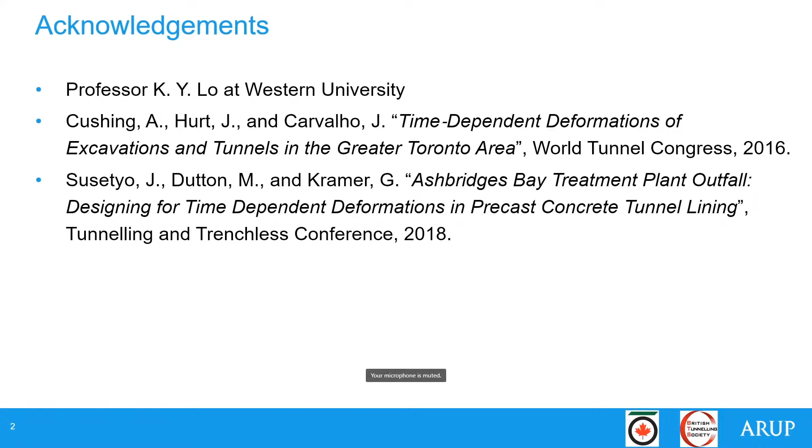Today's presentation is sorted into two groups. First off, we'll be talking about the geology and the background of these shales in Southern Ontario and discussing the various mechanisms and characteristics that they feature. The second half of the presentation, I'm going to focus on three case studies, primarily the Billy Bishop Airport Pedestrian Tunnel, the Hanlan Feedermain, and if time allows, the Heart Lake Tunnel. Finally, I'll summarize with a few takeaways and things for you to remember going forward.

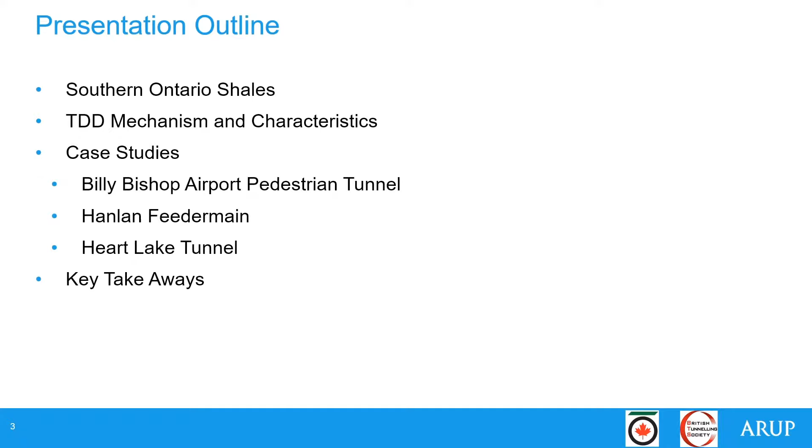The Georgian Bay Shale, which is referenced more than the Queenston Formation, gets a lot more attention because it's what is found primarily around the GTA and where the majority of these infrastructure projects are located. The Georgian Bay Shale is geologically described as moderately weathered to fresh, gray to dark gray, and fine to very fine-grained fissile shale.

It is the formation. It has widely spaced vertical to subvertical joints, as well as closely spaced subhorizontal bedding planes. These bedding planes, or interbeds, are described as slightly weathered to fresh, also gray, and graded with siltstone and limestone. The bedding planes are on average 15 to 30 centimeters thick. If you look at the image on the right, which is a good cross-section of the Georgian Bay Shale, at the top of the image is one of these very thick limestone interbeds.

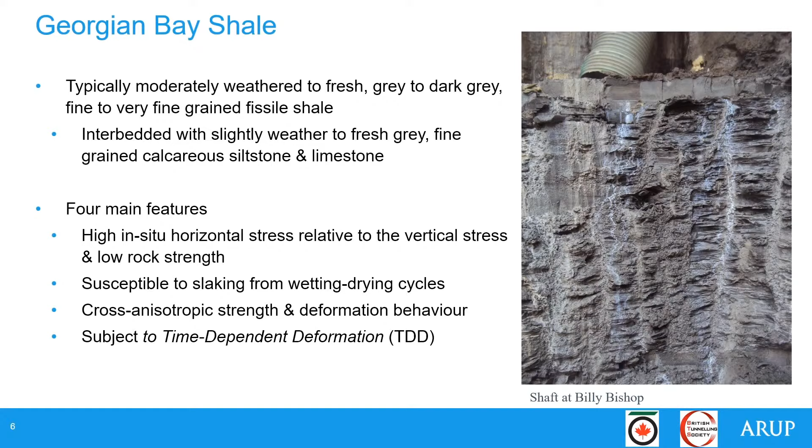Before we go further, we should discuss the nomenclature and what we actually mean by time-dependent deformations. When we think about rock, we're often thinking of two primary mechanisms. We have squeezing: when you have a weak rock, immediately upon excavation, the rock might become plastic and

displace inwards towards the excavation, primarily due to both gravity and stress gradients and redistribution of those stresses. This effect is fairly immediate soon after excavation.

Swelling, on the other hand, is a much longer process. It's often the result of volume change of the rock mass due to water absorption or adsorption effects. Because of this slow absorption of water, it's a quite lengthy process and usually requires a significant amount of time to actually notice a change in displacements.

So when we talk about time-dependent deformations, the literature is actually trying to capture both of these effects together, both squeezing and swelling, the simultaneous occurrence of both of these happening. That being said, a lot of the terms over the last several decades have used the term swelling just in their nature, and so I'll be sticking to that standard as I describe this further.

So let's discuss the various mechanisms, characteristics, and why we are concerned about them. As I was mentioning before, this isn't your typical rock swell phenomenon.

Looking at the mineral composition of these shales, doing an X-ray diffraction test, we see that there's actually rather small minimum amounts of swelling clay minerals found in the rock. Also, there's very negligible amounts of swelling minerals such as anhydrite or pyrite. So it's not your typical mechanism that people think of when they think of swelling.

Lee and Lo, in a rather landmark paper in 1993, showed that over a period of several weeks, the salinity of a sample, the blue line, slowly decreased over time, whereas the vertical strain of the sample showed to be increasing over time.

So they determined that the driving mechanism was this exchange of cations between the salt-rich pore water of the rock mass and the ambient fresh water. Getting a little technical, what that actually entails is the cations leaving the sample from diffusion and fresh water entering into the sample from osmosis.

This process propels both the formation of micro and macro cracks, leading to the sample becoming saturated and leading to an increase in volume. So to emphasize, this process of diffusion and movement of water is a rather time-dependent behavior, owing to the fact that we have this time-dependent net result.

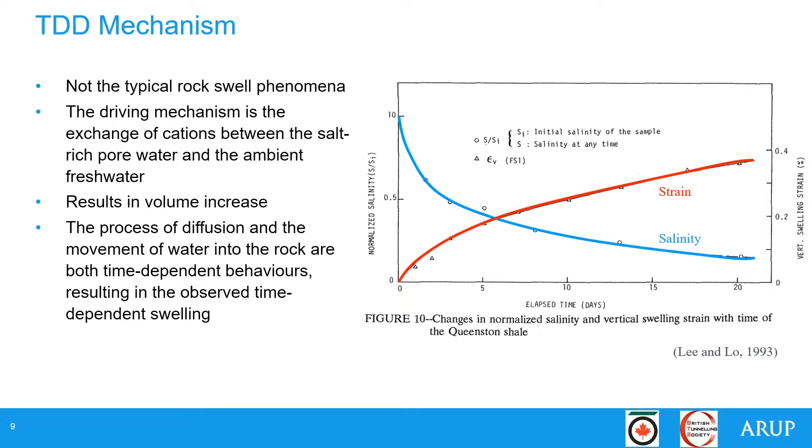There are several conditions required to initiate this swelling. Lee and Lo in that same paper identified three. There needs to be a relief or a change in the stress state of the rock mass, such as from an excavation, for example.

There needs to be accessibility to water immediately in the vicinity, and that water needs to be fresh. There needs to be an outward salt concentration gradient between the fluid found in the rock and the ambient fluid on the surface.

It doesn't necessarily need to be saturated or have water always present on it. It can also be from humid air in the vicinity as well, creating this concentration gradient.

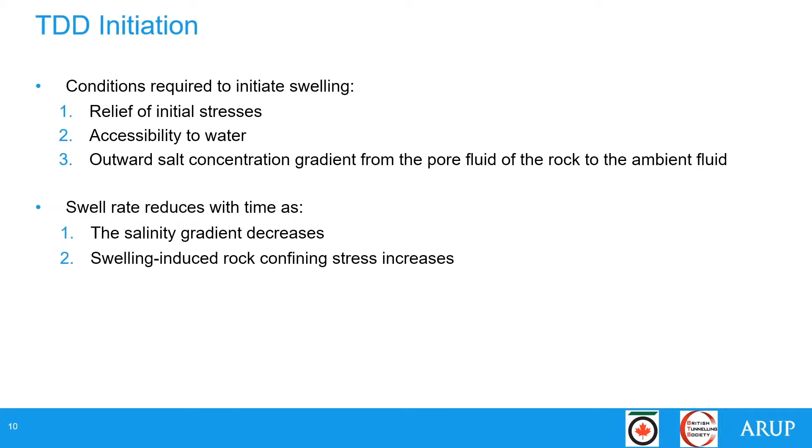Over time, the swell rate reduces. This is just due to the salinity gradient decreasing over time. As the process goes on, the concentration decreases, and so the swell rate decreases. However, as this process goes on, the swelling-induced rock creates a confining stress or pressure that gets exerted from this process, which we need to consider.

There's been a fair amount of research over the last century. As early as the early 1900s, researchers have appreciated this subject.

In Niagara Falls, a rather large waterfall in southern Ontario, there's a power generating station, and engineers started to measure the displacements of the wheel pits and what was happening over time. We've seen this plot that starts in the early 1900s. On the vertical axis is movement, and over half a century or more, there's upwards of 1, 2, or even 3 inches of movement, so quite significant.

Then in the 1950s, there was renewed interest in this material because the Sir Adam Beck generating station was going to be constructed, and people started looking once again into this phenomenon.

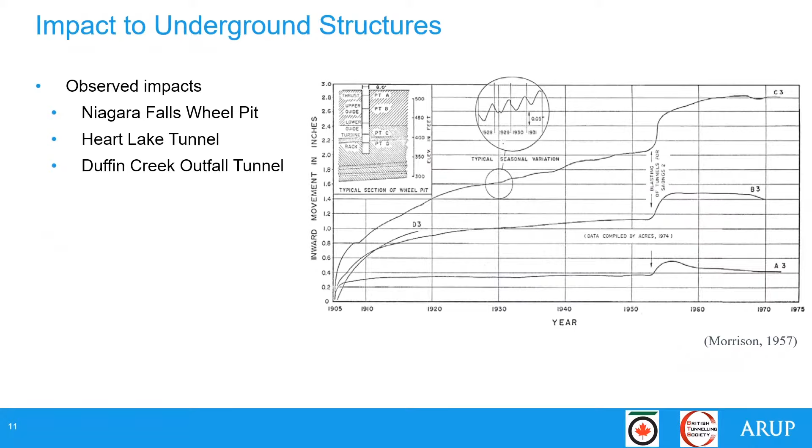In the 1970s, there were 2 principal projects, both the Heart Lake tunnel and the Duffin Creek outfall tunnel. They both experienced severe cracking at their spring line. The Heart Lake tunnel, which we'll talk about later, within just 3 years of its completion had severe cracking of its spring line, leading to the need for rehabilitation and further research into what happened. A very similar effect was seen on the other project as well.

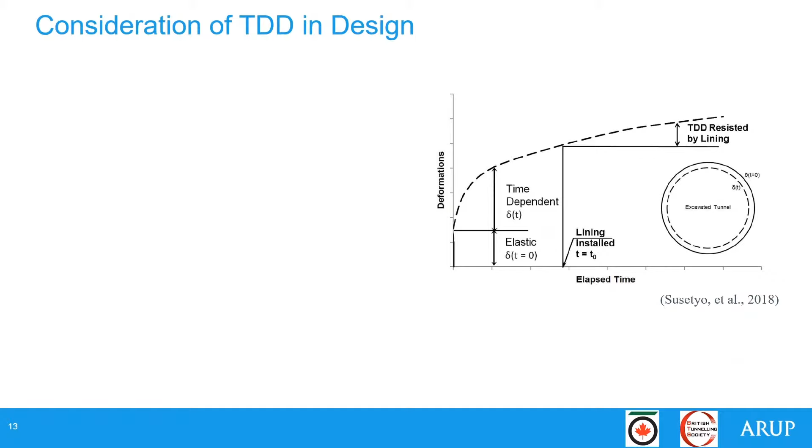If we install a lining at some point, T0, after the initial time—perhaps a segmental lining put in place by a TBM, or the final lining cast in place for a permanent shaft—once it gets installed, if we draw a line up, we can see how much additional movement the ground wants to impart. That additional movement is going to cause a stress on the lining, depending on how flexible or stiff it is.

To recap, the consequence of TDD is additional stress on the lining, which needs to be considered. There are 3 principal ways to do this. You can wait—a pretty common approach for many projects in the GTA. By waiting 100 or more days upon the initial excavation, a large percentage of the expected movement is going to dissipate and just expand into the exposed open shaft, so we won't have to worry about such a large percentage displacement.

The other approach is to apply a compressible material. If you imagine putting some foam between the rock face and your final concrete lining, if the rock wants to keep moving, that's fine—it can just push on the foam and only minor stresses get transferred to the lining.

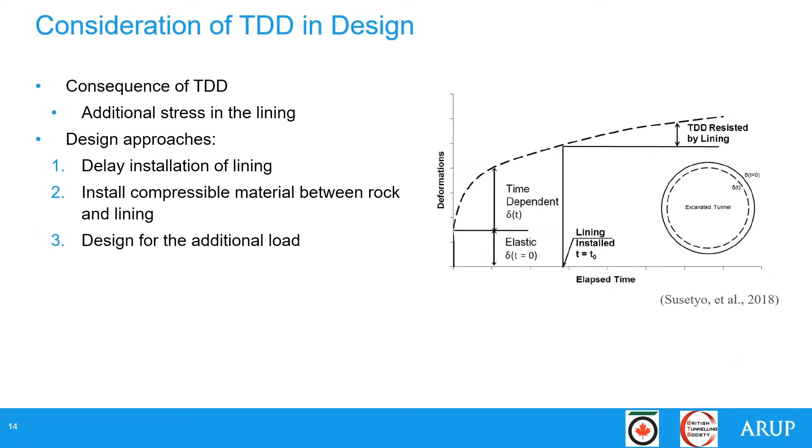The third approach is to design for it. If you have a good grasp of how much displacement is going to occur and good input parameters, there's enough knowledge out there in the industry now that we can put some numbers to this and design the lining accordingly.

So let's talk about how we quantify TDD, returning to this wheel pit example. I've now taken that information and plotted the values on a log timescale. A lot of approaches for TDD plot things on semi-log scales, which helps show correlations a lot better.

For different depths along the shaft, several different monitoring points were examined: A, B, C, and D. It's quite interesting to see that the measured displacements were quite different at different spots—overall a similar magnitude, but different rates.

For example, the orange and yellow lines had very little displacement for the first 100 days, and then soon after, around day 200 or 300, displacement started picking up. Perhaps at this point some stress changed in the ground, or perhaps more fresh water was exposed to the face and displacement started picking up.

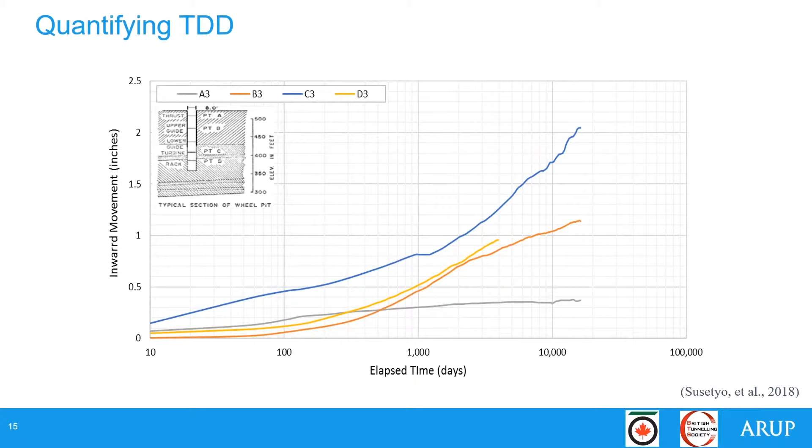On the other hand, the blue line shows a very consistent increase in displacement over time. The main takeaway, however, is that when viewing the displacements on a semi-log graph, we see a rather linear relationship.

So to recap, if we plot that swelling strain or displacement against a semi-log scale, we can see a linear relationship. Researchers have termed this swelling potential as the slope of this line. For example, in this graph, 0.223 is the swelling potential of this sample. A higher percentage or swelling potential just means a higher tendency for the rock to swell upon stress relief.

Most lab studies are done over 100 days. Generally, we don't look at the effects over the first 10 days. They're deemed too short a period over the grand scheme of what we're looking at here in terms of years, so we disregard the first 10 days. That leaves us with between days 10 and 100 as a good place to draw correlations from.

Ideally, it'd be great to have a lab study that runs for hundreds of days afterwards, but that's not practical. We can't have a geotechnical exploration before a project that requires 3, 4, 10 years of data collection before we can draw conclusions. So we're forced to look at just the first 100 days to figure out what's going on. The only other way to look at what happens after the first 1,000 days, or the first 2.5 years, is to look at example projects where people have gone back, such as those wheel pits in Niagara, and seen what has actually happened.

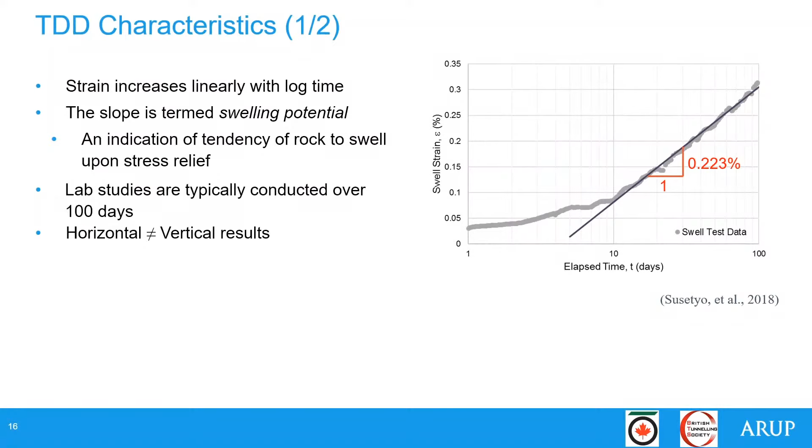If we take this information and start plotting it against the applied stress to the sample, we can start seeing some interesting relationships between the applied stress and time.

Lo and Lee, in their 1990 paper, discovered a rather interesting relationship: when stress is applied to the sample, less swelling is observed. If we apply 5 MPa, the sample reduces how much swelling occurs. However, if we apply a lot of stress above a certain threshold called the critical stress, the swelling pressure goes away entirely. The sample ceases to move, it's contained. This is determined from a type of test called the null swell test, which we'll get to on the next slide.

Lo and Lee also discovered another interesting phenomenon called the pseudo-Poisson's effect. If we apply stress in one direction, such as the vertical y-axis, and measure the displacements in the other direction, the horizontal or x-axis, we actually see a reduction in displacement in that axis as well. So what's going on is if we squeeze in one direction and measure in the other, there's a reduction, sort of like Poisson's effect in mechanics.

I forgot to mention in the last page that what we measure in the x direction is often different than the y direction. The sample, being anisotropic, has different properties in both the horizontal and vertical directions.

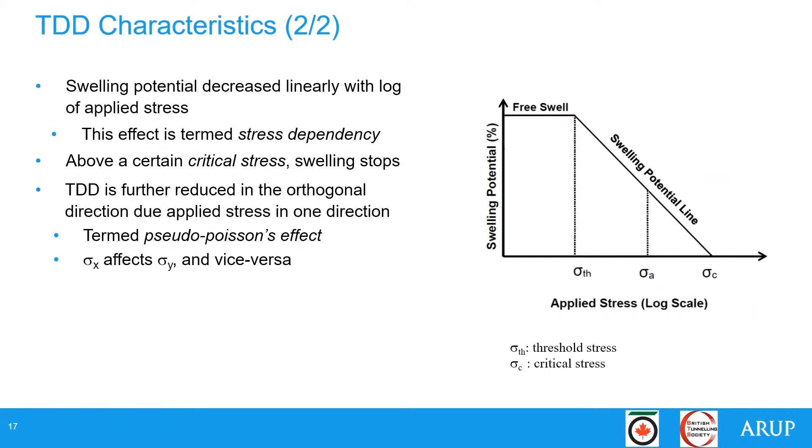The main types of tests to try and quantify these parameters: there are 3. There's the free swell test, shown on the left. The sample gets wetted and put into a reference point or gauge, and we measure the displacements over a given time period. The semi-confined test in the middle is quite similar, except in this case a sample has an applied pressure in one direction, and we measure what displacements occur.

The null swell test was what I was referring to before. It's a little different in that the sample is exposed to water and a variable load is applied through a load cell. The deformation is prevented from occurring, and instead we look at the changing load over a given time period.

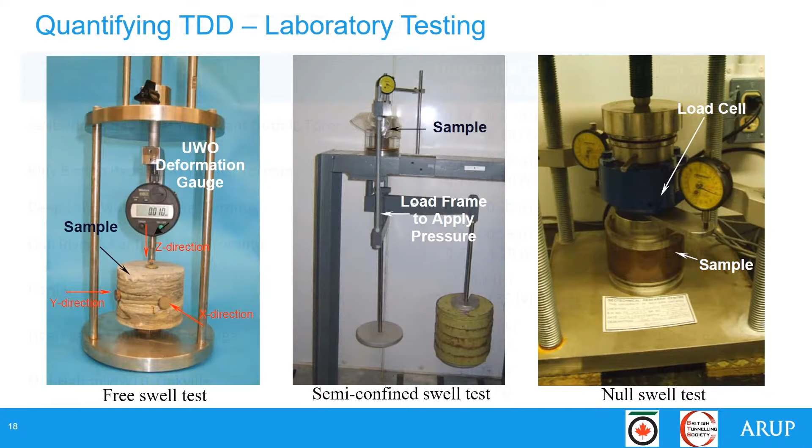I'll give you a quick snapshot of a couple of different projects in the GTA. There's quite a few numbers on the slide, but just to give you a quick overview of how things compare.

Generally speaking, the swell potential from various samples can be quite diverse, so the engineer needs to apply some judgment in coming up with the parameters. But the difference between the horizontal and the vertical is quite apparent, often on the order of 2 to 3 times bigger in the vertical direction than the horizontal direction due to those bedding planes. The critical stress is also quite different depending on where the sample came from. Different depths lead to different critical stresses in just different regions around the GTA. So it's critical to do the proper investigations and not just rely on past projects that may or may not have the same sort of parameters.

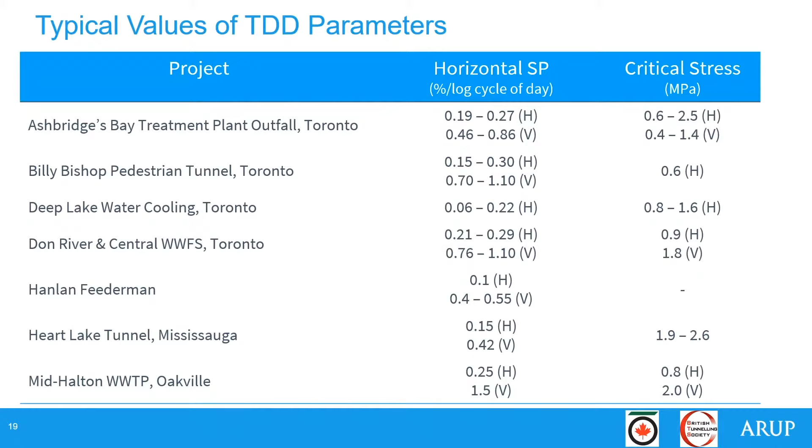To help with logistics of all that and help relieve the traffic, they decided to build a tunnel underneath the lake and in the rock bed below. This was opened in 2015.

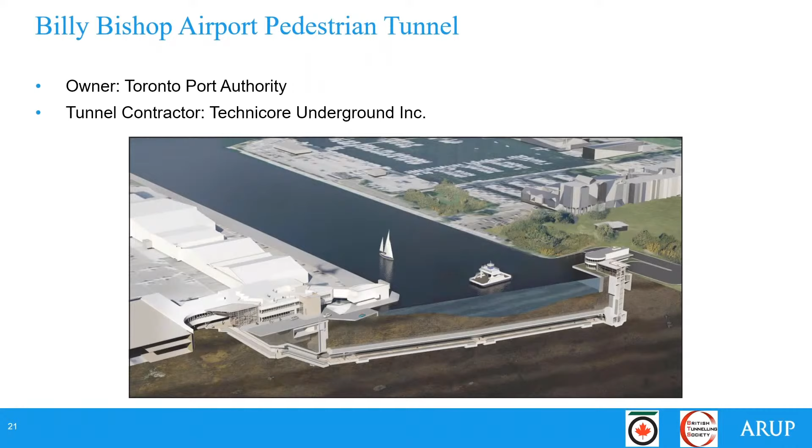The mainland shaft on the right-hand side of that previous image is approximately 33 by 14 meters in plan and 35 meters in depth. There's about 8 meters overburden above, which was supported by secant piles, before then anchored into the rock mass below. And then inclinometers were installed behind to monitor what was happening during excavation, as well as the long-term effects.

Just to give you an idea of what the rock support was, it was very simply supported by just mesh and bolt to prevent local failure of any small blocks that might fall out and injure people below. Generally, the rock Georgian Bay has good enough strength to remain stable for the period of a construction window.

Those boreholes, as I was mentioning, there were 2 of them. One that was quite close to the face, about half a meter away. Another one 3 meters from the face on the mainland side. Over time, this plot shows the displacements, horizontal displacements during the excavation period. We can see in the bottom right-hand corner that after excavation finished, the horizontal displacement kept on increasing. This was the effects of the time-dependent deformations.

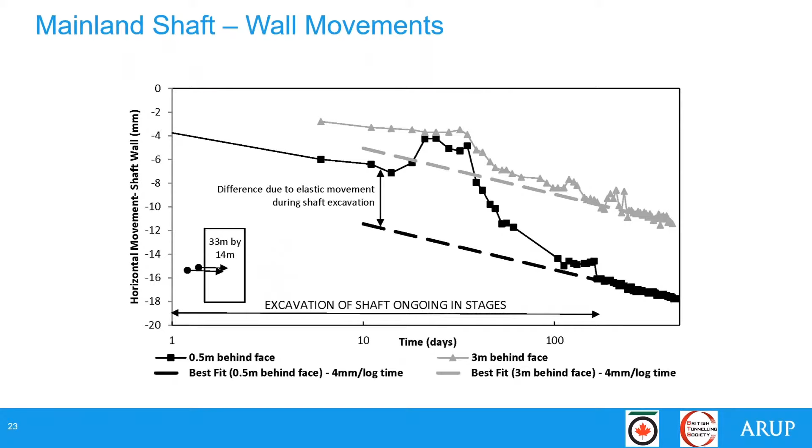Plotting some best fit lines to this data, we can generally see a very linear behavior after the excavation process finished, on the order of 4 millimeters per log cycle of time. So that's 4 millimeters from day 10 to 100 and day 100 to 1000.

The tunnel was constructed through a rather interesting sequence. The first step was to install a canopy of drift bores using microtunneling. These bores were 1.8 meters in diameter. There were 7 of them across the crown to provide good support and try to cut off the water above.

Overall, the initial support was provided by light steel ribs in the drifts, but there was no support provided on cut 1 due to the short window that it was going to be exposed. Cut 2 was supported by bolts and shotcrete.

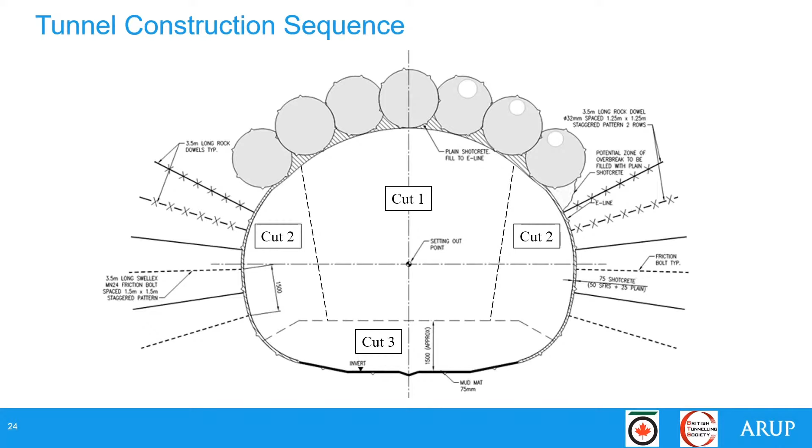Here's a snapshot of Andrew Cushing, one of the co-authors of the paper, standing beside the microtunnel, and an example of the steel plates that were in place before they were backfilled with concrete.

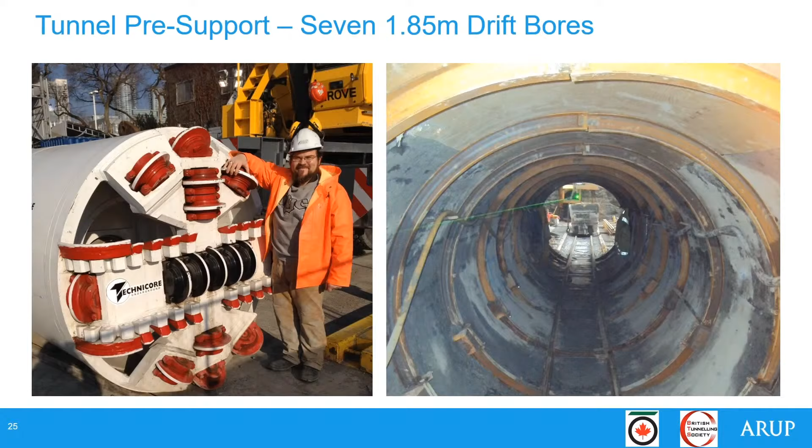Looking at the movements, engineers went inside these drift bores before they were backfilled, and using a tape extensometer measured what was happening from their convergence.

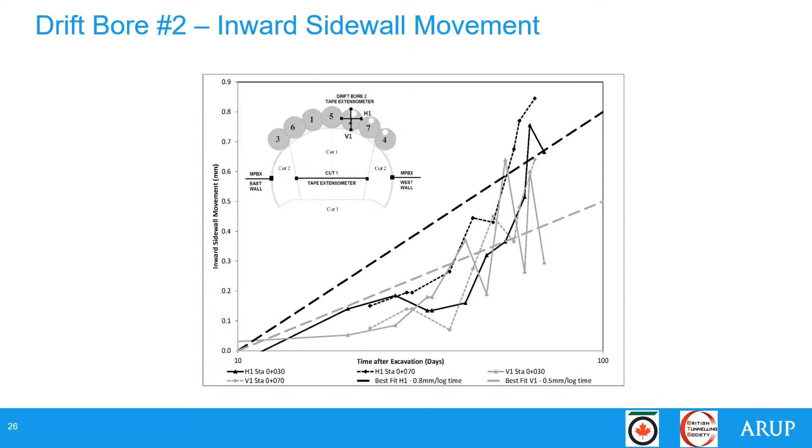Once again, fitting best lines, we can see a reasonably consistent increase over time. But I'm sure some of you have already noticed that on the vertical axis, we're talking very small amounts of movement in this case. Compared to before, where we had 4 millimeters per log cycle, now we're down to about less than 1 millimeter per log cycle, a rather small amount, perhaps due to the short duration, or just they weren't exposed to as much water, or perhaps just their smaller nature led to smaller displacements.

Some more construction photos, so we can see those drift bores in the crown already backfilled with concrete, providing a safe working area for people below, and the cut 1 underway.

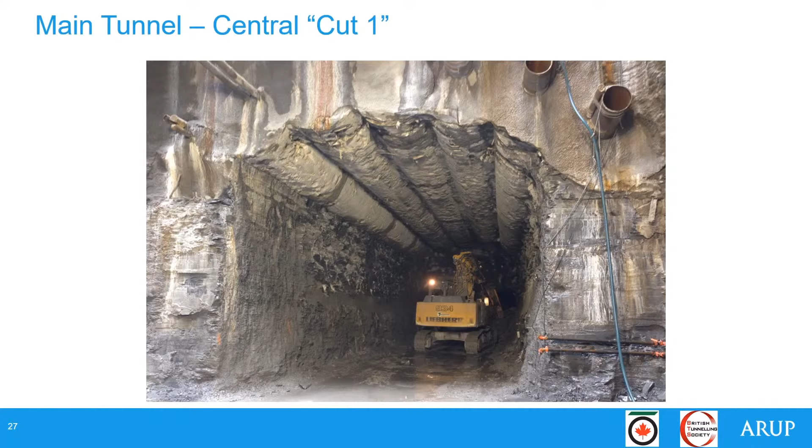Then we had cut 2 enlarging on either side of the tunnel, and they had a frame hung from the ceiling to help the excavators map out the sequence and the geometry.

So plotting, so this time we measured the displacements of the openings. A tape extensometer was used on cut 1 to measure the change of the diameter, and then MPBXs were installed into the east and the west walls.

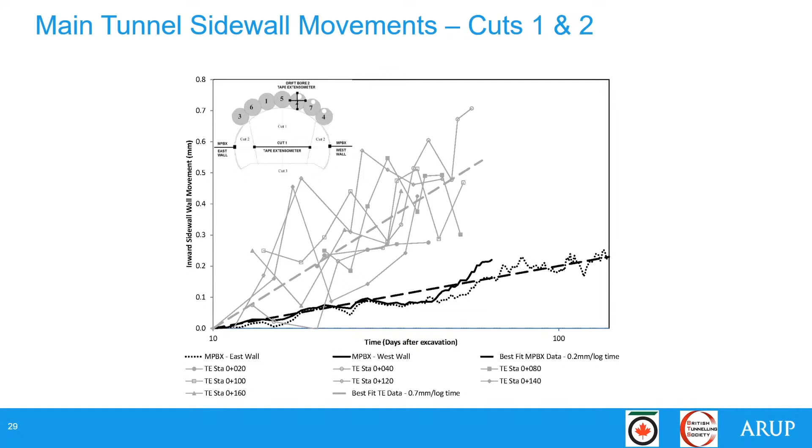It's always good to check your numerical models. So before the excavations were complete, or started I should say, some FLAC models were run to try and do some predictions of what was going to happen.

It's a rather localized phenomenon just right on the vicinity. Anything further back is limited to deformations just due to that critical swelling stress, because it's keeping the rock mass tight, and no swell can occur.

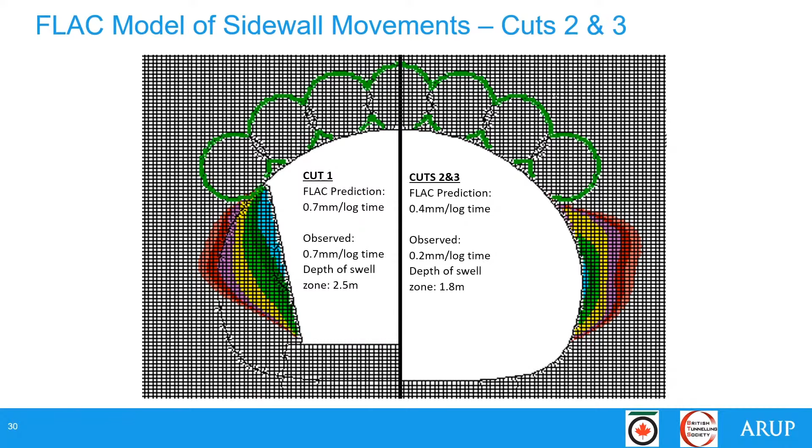Moving on to our second case study is the Hanlan feeder main and water main contract. Just west of the city of Toronto is the city of Mississauga in the Greater Toronto area, and the region of Peel, which oversees the region's water and wastewater master plan.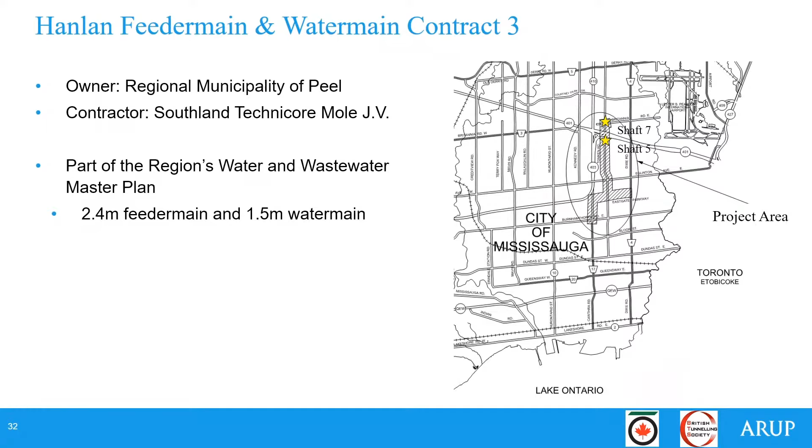I've marked out the 2 shafts that we're going to be talking about with the gold stars, shaft 5 and shaft 7. These 2 shafts were instrumented with inclinometers behind the face to observe what was going to be happening over the long term.

Shaft 5 was a circular shaft, just over 13 meters in diameter. Shaft 7 had a rather unique trapezoidal shape, 6 to 9 meters long and about 4.5 meters wide.

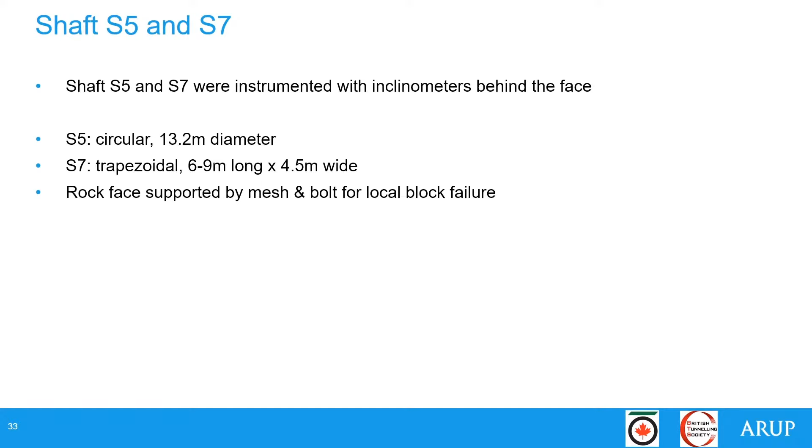Just like the Billy Bishop shafts, these were lightly reinforced with mesh and bolt to prevent local failure. Here's an image of shaft 5 on the left and shaft 7 on the right.

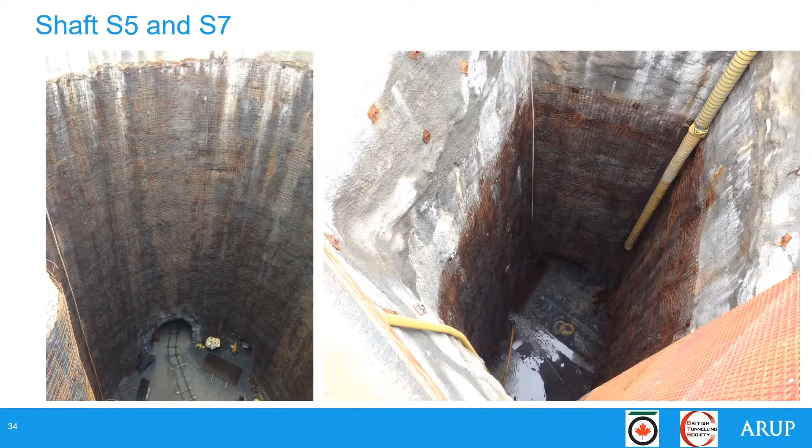Design mitigation is interesting, as we talked about earlier on. The designers for these took a couple of approaches in mind. They first off looked at TDD as a load case.

They came up with 200 kPa as an additional load that was going to be applied to the shaft wall, that the final lining must resist. They also considered mitigating the effects through means and methods.

The easiest approach, if the schedule allows for it, is to simply wait and delay the installation of the final lining. The longer you wait, the more deformation should occur early on and less in the long run. There's also installation of drain mats.

You can see a blow up in the center and what it looks like installed. This created a void of about 20 millimeters thick, a little bit of a gap between the final concrete and the rock face, just to provide more of a cushion for the rock to push into.

Measuring displacements from the inclinometers. The inclinometers are a little more of a noisy instrument than the precision tape extensometer or the MPBX. We see a rather large scatter over time in both these shafts.

Trying to fit best lines to this, we can draw some very loose correlations, but the displacements in this case are quite small. I should also mention that the first inclinometer reading took place after the shafts were complete, so any displacements we're seeing here are solely inferred to be from the time-dependent deformations, so a rather minimal amount in this case.

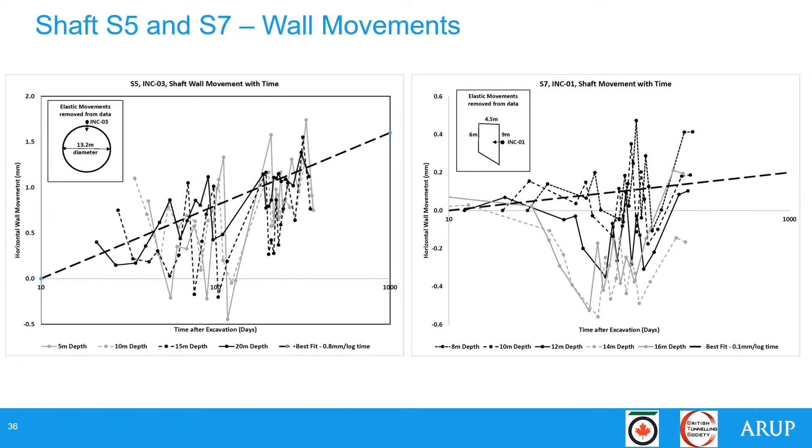The Heartlake tunnel is a rather interesting job because it really kickstarted a lot of the research in this field. Built back in the early 1970s by both drill and blast and TBM methods for different stretches of the tunnel.

It was about 2.7 to 3 meters in diameter, depending on the different stretches, and featured a final lining thickness of 300 millimeters. In the drill and blast section, the ratio of horizontal to vertical stress was very high, a K ratio of 20 to 40, combining very high horizontal stress with very low rock cover, leading to very low vertical stress.

Soon after construction was complete, the full length of the drill and blast section, 183 meters, began cracking about 3 years after construction. The TBM section, which was in the slightly deeper region, had a lower K, but also observed similar damage, just a couple years later.

While I don't have displacement measurements to report to you, the crack widths were significant, talking about 6 millimeters of crack, so that's a rather damaging effect and quite bad for a permanent lining.

Also, there was lots of movement horizontally along the crack face, about 4 millimeters, so constant movement and a lot of concern. It's quite interesting that this project back in the 70s featured a large amount of displacements, whereas the two examples that I showed feature much less.

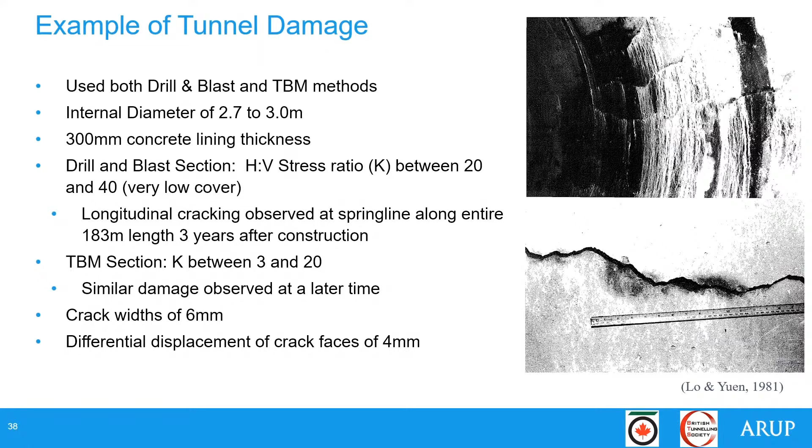Just to summarize a couple of key features and key takeaways I want to leave you with: the results of TDD will lead to additional convergence of the ground beyond the initial elastic response, and may be present for years long after construction, which must be considered in the design phase by the engineers.

These deformations are a function of a couple of main parameters. Firstly, the excavation shape, because it influences the stress redistribution and what the null stress might be in preventing deformations from occurring. The in situ stress is also a rather important parameter because it sets up how much stress is going to be released and how much movement can occur by the rock mass. The swelling parameters naturally are also quite important and need to be well measured.

Literature, and research, has reached a point where it's reasonable to predict what's going to happen using numerical methods such as FLAC or other closed form solutions. However, to do this, we need to have both a good understanding of the rock mass information from quality lab test data, and also a good measurement of what the rock mass stress is, and this is quite hard to do.

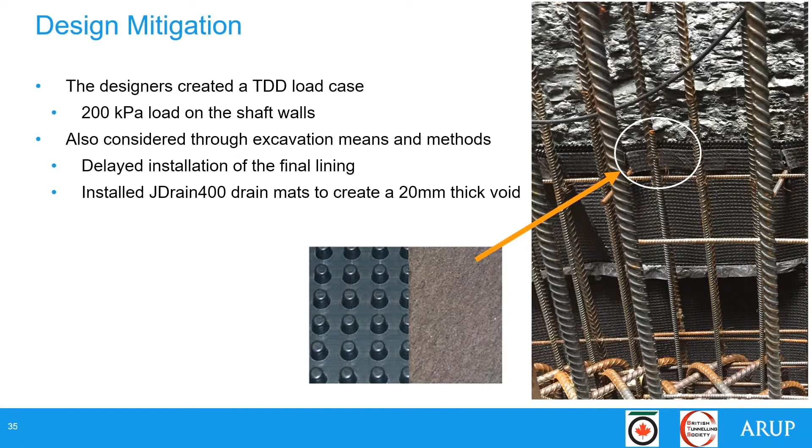Good question. There's one more question: over what sort of time does it take for deformation to fully dissipate in the shales? There was an example for Heartlake when the lining deformation occurred after about 2 or 3 years.

That's a tricky question to answer. The theory would say never, because it exponentially increases forever on a log scale, but we're talking about diminishing percentages as time goes on. So when plotting on that semi-log scale of time, I don't have a percentage for you, but a large percentage is going to happen in the first 100 or first 1,000 days, and after that everything becomes quite small. That's why waiting is one of those good approaches — if you can wait 100 days, you're going to chop off, for example, 50% of your deformations. I don't have the precise number, but if you look at plots on a log scale, you can work out the math of how much is going to be lost.

So, we keep getting more questions. Yeah, keep getting more questions actually.

Amazing. So, were there any issues during construction related to the geology and unexpected groundwater conditions, and how did the team solve them? I think it refers to the construction case study you just referred to.

So I should admit that I haven't personally worked on either of these projects. Both my colleagues have much better understanding, so I can defer some of those answers to them, and if they want to reach out to me, I can help connect.